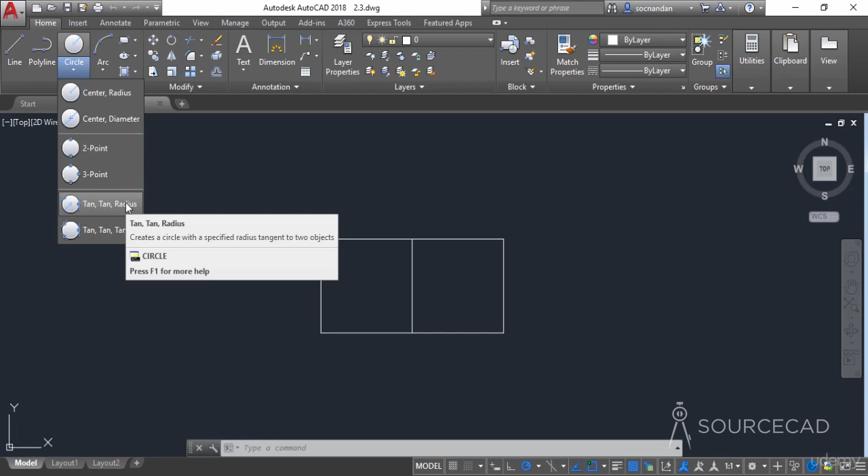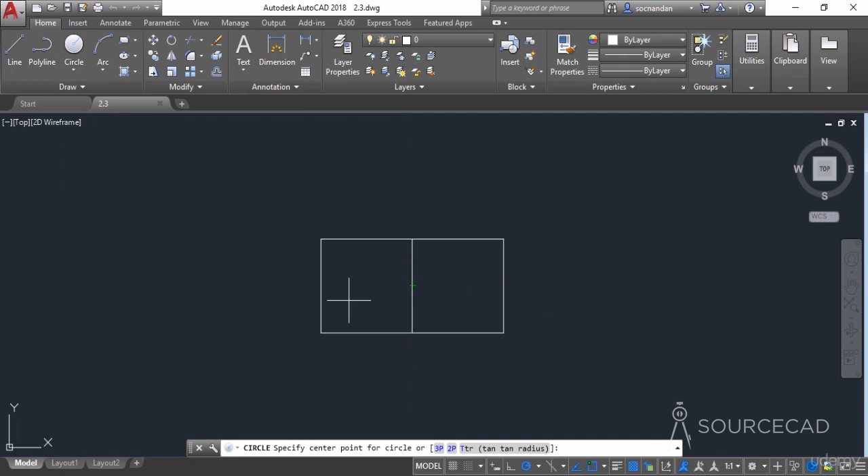The most basic method is center radius. To select the command, click on the center radius option, or use its command equivalent, circle or C. After starting the command, click at the point from where you want to start the circle. In this case we want to start from the midpoint of this rectangular geometry, so I'll click at this point and this will be the center of our circle.

Now look at the command line, it prompts you to specify the radius of this circle. Let's enter the radius as 1 unit and press enter. So now here we have it, the circle with a radius of 1 unit or a diameter of 2 units at the center of this line.

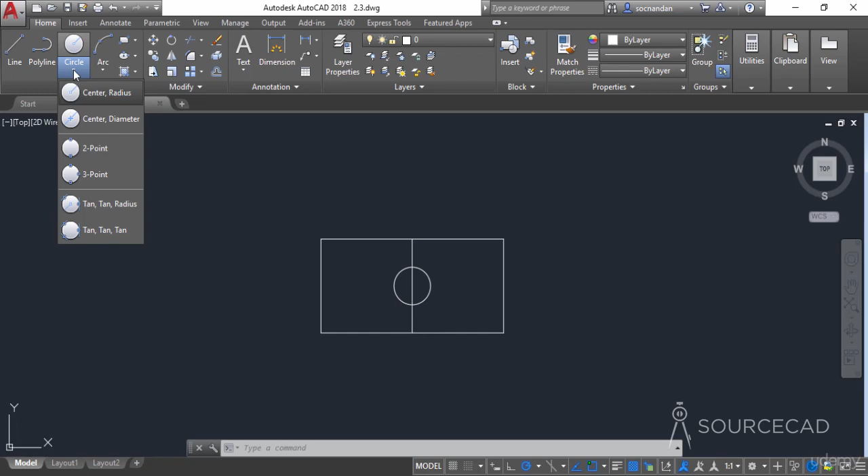Now let's look at another method of making the circle. Go to the circle flyout and select center diameter. In this case we need to specify the center first, and when you look at the command line you'll notice this option has been overridden, and now it says we need to specify the diameter of the circle. Let's type 3 as the diameter and press enter, and now here we have it, the circle with a diameter of 3 units or a radius of 1.5 units.

You can also start the diameter option from the center radius command. Click on center radius, then click at this point or any other point to start the circle. Now you can click on the diameter option on the command line, and simply enter the diameter value. Let's say we want 4 as the diameter value, press enter, and here we have it, the circle with a diameter of 4 units or a radius of 2 units.

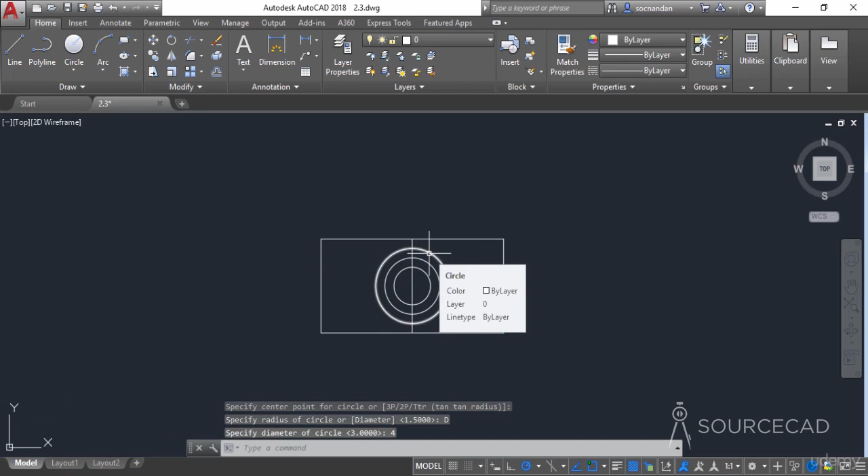Let's now erase all of these circles and look at the remaining options. The next option is a 2-point circle. What if we want to make a circle that connects 2 points, for example the end points of this line? Here we can click on this point and then click on this point, and here we have the circle, with this line acting as a diameter for the circle.

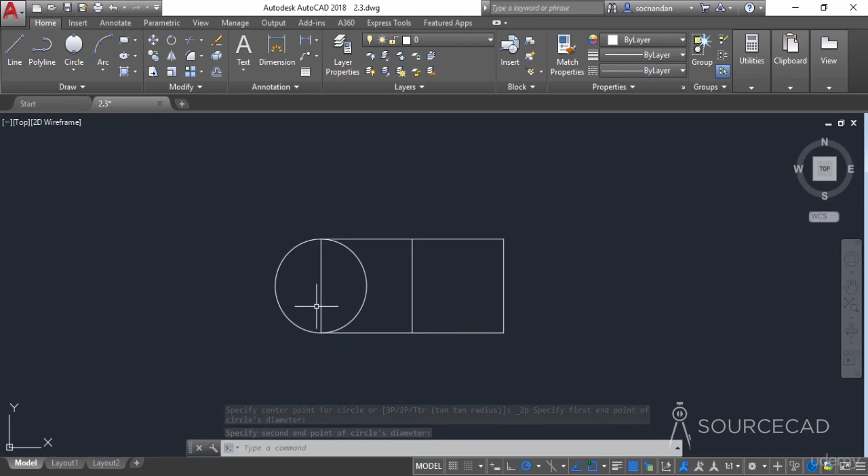Now let's click on the flyout again and select 3-point. In this case we need to specify 3 different points. I'll select the first point, then the second point here, and now I'll select this point, the midpoint of this line. Here we have it, the circle on 3 different points. This circle will pass through these 3 points, and its radius will be decided based on the geometry or the points we click.

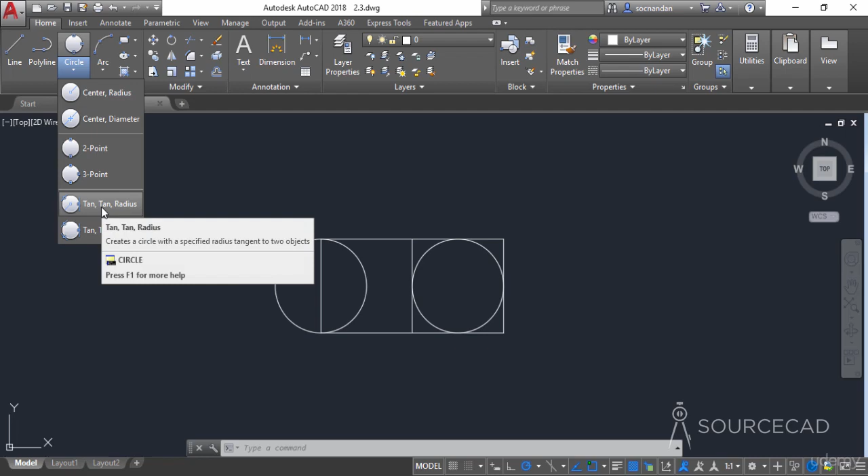Now let's look at the remaining options. We have one more option here, which is tangent tangent radius. I'll select tangent tangent radius, and now let's select any geometry for the first tangent point. Click on this circle, then click on this line. Now the circle will be tangent on this circle and on this line, and we need to enter the radius appropriate for this geometry. I'll enter 2 and press enter, and now this circle is tangent on this circle and on this line, with a radius of 2 units.

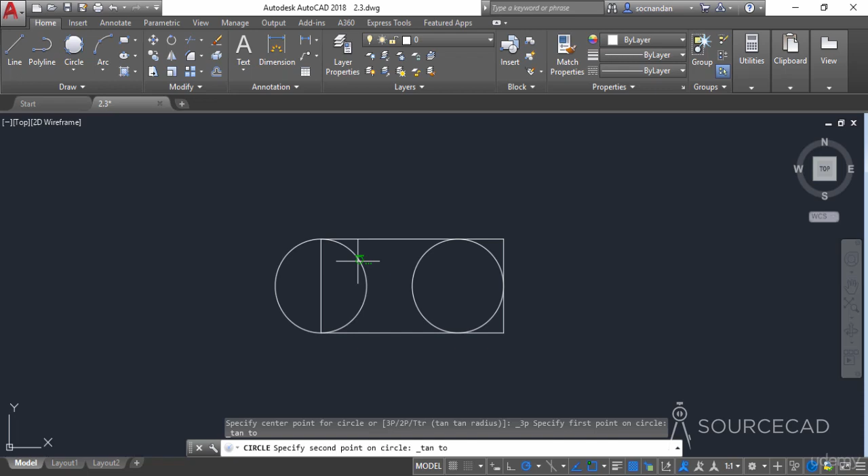Now what if we want to make a geometry that's tangent on 3 different geometries? For that I'll first erase these 2 geometries, and now we'll make a single circle tangent on this line and on these 2 circles. I'll select the last option, which is tangent tangent tangent, then click on the first circle, the line, and the second circle. Here we have it, this circle is tangent on both circles and also on this line. So these are the different ways of making a circle in AutoCAD.